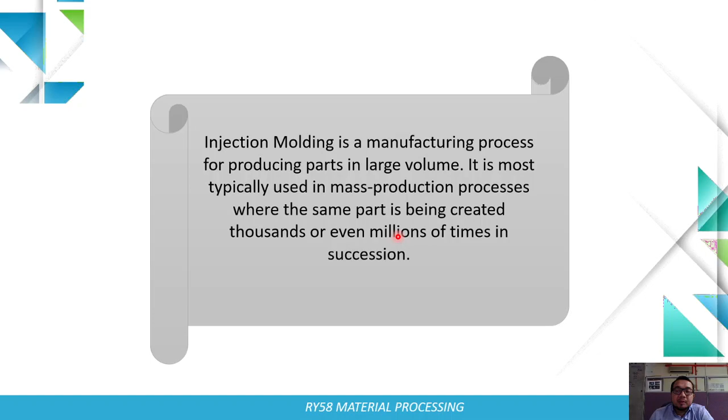For the introduction, injection molding is a manufacturing process for producing parts in large volume. It is most typically used in mass production where the same part is created thousands or even millions of times in succession. The principal advantage of injection molding is the ability to scale production once the initial cost has been paid. The price per unit during injection molded manufacturing is extremely low, and it tends to drop drastically as more parts are produced.

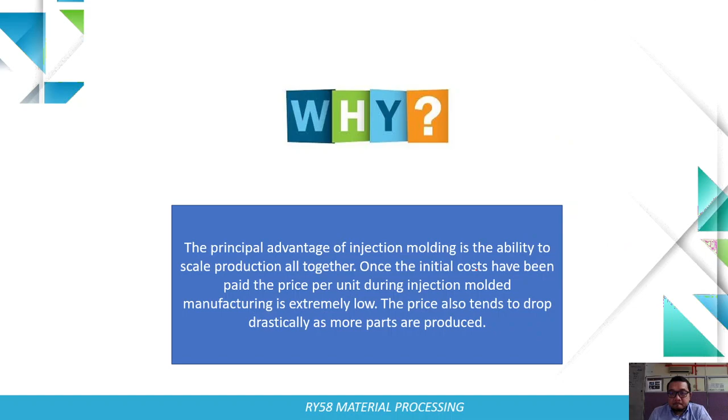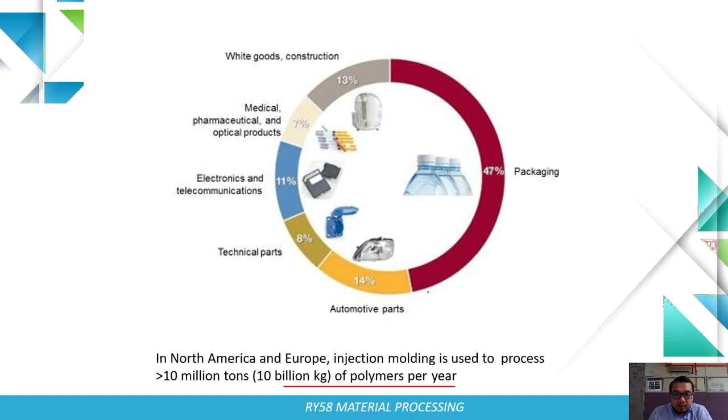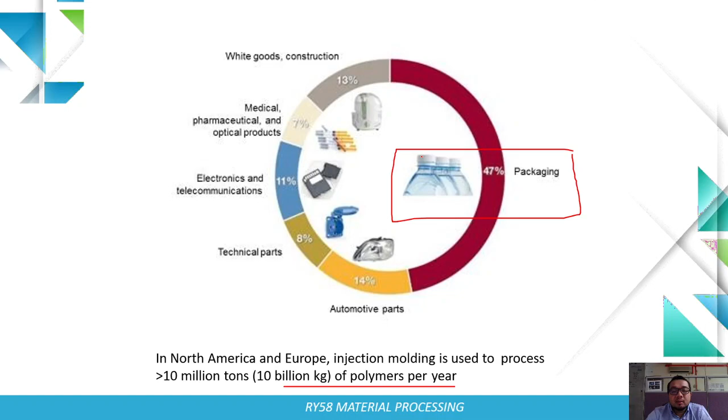This is a pie chart for polymer usage per year in North America and Europe. Injection molding is used to process over 10 million tons, about 10 billion kilograms of polymer per year. This is for white goods: construction 13%, medical, pharmaceutical and optical products 7%, electronic and telecommunication 11%, technical parts 8%, automotive parts 14%, and the rest is for packaging. So this is the uses of polymer per year in America and Europe.

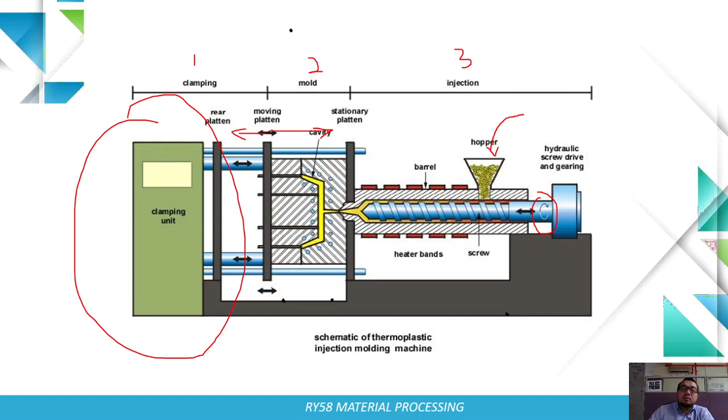This is the schematic diagram for the injection molding machine. Firstly, a hot or molten polymer is injected into a closed and cold mold for thermoplastic, and a hot mold for rubber and thermoset. For rubber and thermoset, it only uses a hot mold, but for thermoplastic, it can be used for both closed and cold mold.

So the polymer is heated and molten in the barrel. A screw injects the melt polymer into the mold through a nozzle. After the part cools and solidifies, the mold is opened and the part is ejected.

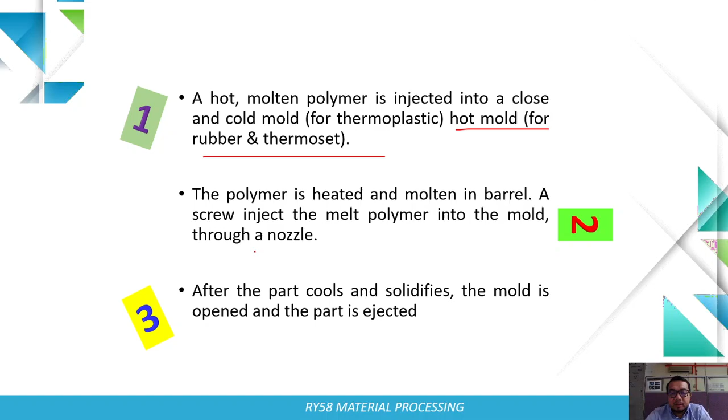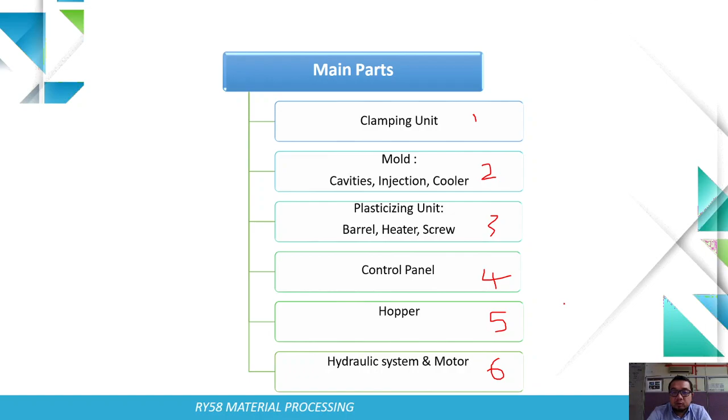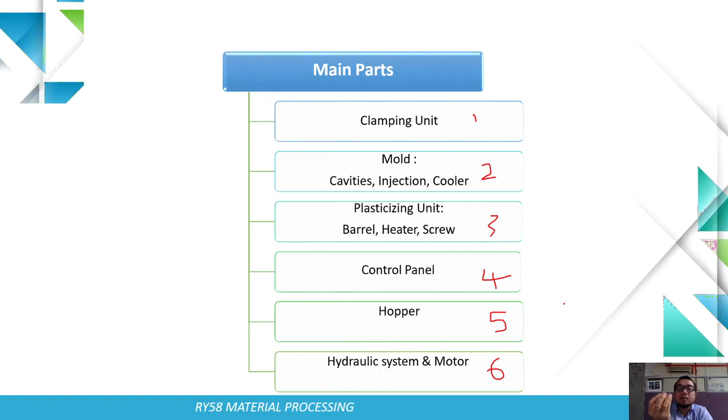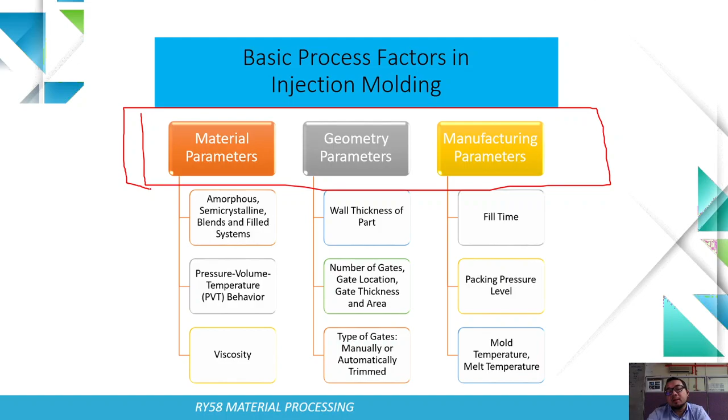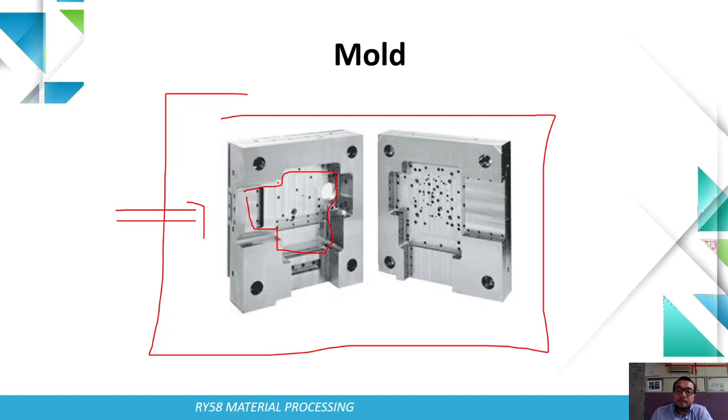This is the mold cavity space: this is the mold and this is the cavity space, the inner part. Cavity is this empty space. So the mold cavity space is a shape inside the mold. So the molding material will take on the shape of the cavity space into the desired product.

Mold in foundries is destroyed to release the product. Today, mold for injection molding are made from strong, durable materials: steel, softer aluminium, metal alloy, and certain plastic. Before, most molds were made and then had to be broken to get the sample out. But today, molds for injection molding are made from material that is strong and durable.

So, number of cavities: particularly mold for larger products are built with only one cavity space, or single cavity mold. However, many molds, especially for large production mold, are built with 2 or more cavities. So the reason is why?

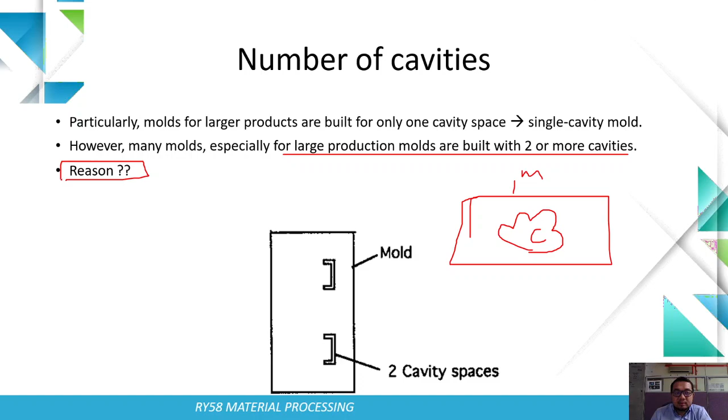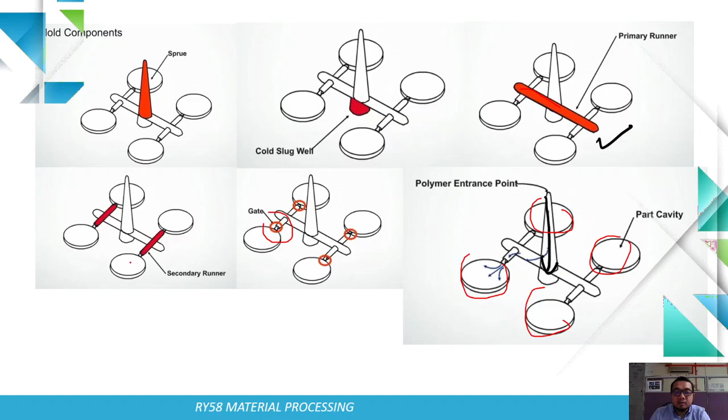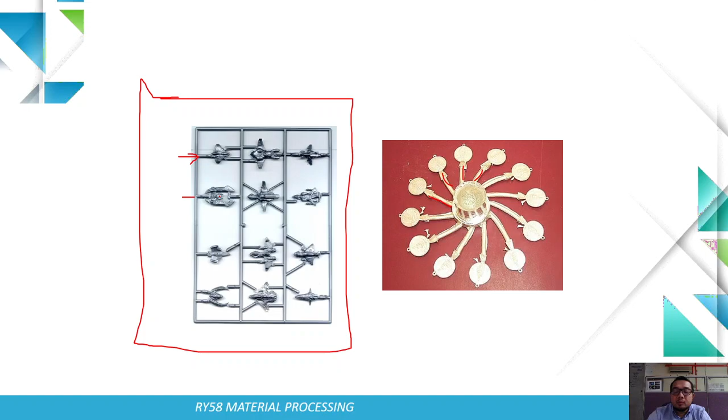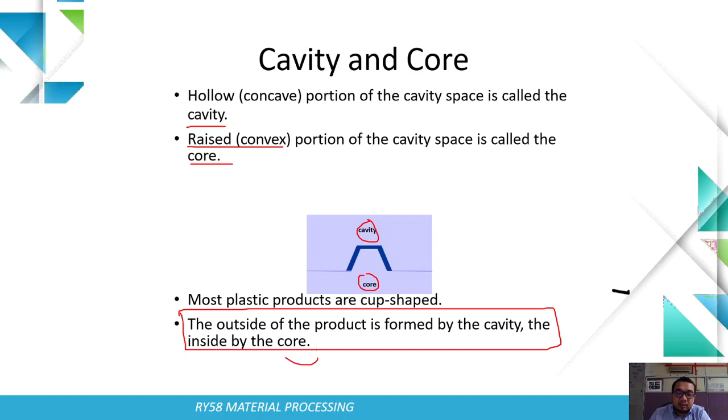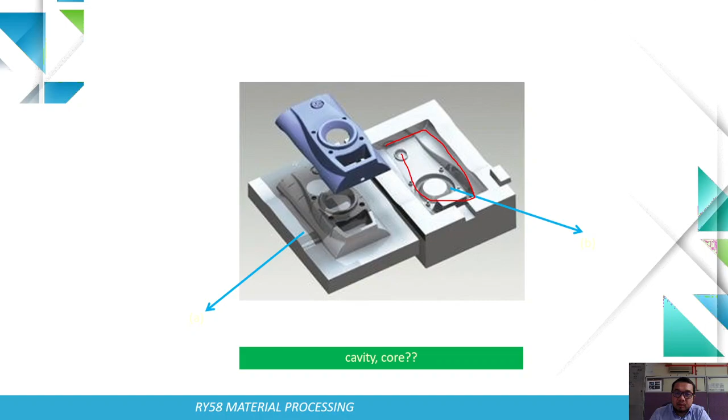So which one is cavity? Which one is core? Okay. This is cavities, ruang kosong. And inside the cavity is core. This is the core and this is the cavity.

So what is the parting line? Parting line is the flat parting line di antara cavity dan juga core.

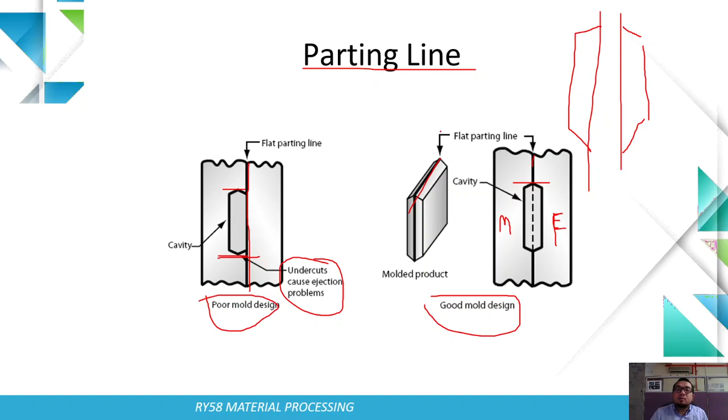Kalau kat sini, contoh dia ambil sekerat je. Ini sekerat, nak bagi nampak lagi lah. Dia boleh terus tarik keluar daripada shape tu. So this is the typical flat or straight parting line for different cavity shapes. This is the product, the sample kamu. Kita tengok dia punya parting line semua dekat, dia ambil dekat tengah sebab nak memudahkan proses ejection.

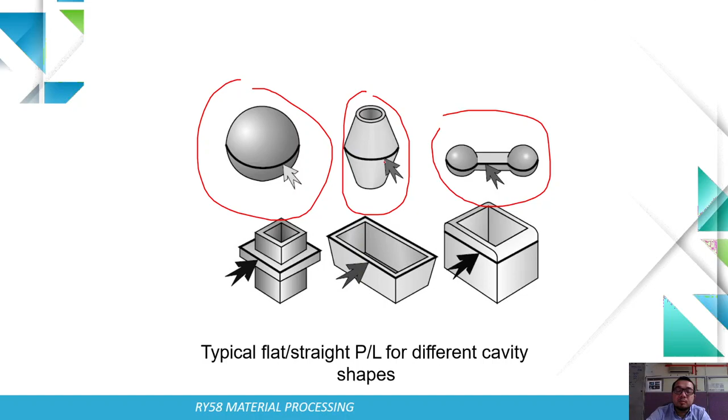So the second part is sprue, runner dan juga gate. Ini yang dipanggil, yang saya tunjuk tadi, yang kon merah ni. Nampak kon? Ini dipanggil sprue. Bukan yang putih ni, yang merah ni.

The sprue bushing receives the plasticated material from the injection nozzle, which closes off the barrel and is pressed firmly against the sprue bushing. Frequently, a single cavity mold has only a sprue, the part is then said to be sprue-gated. Dia inject masuk kat sini, kamu punya plastic material, dia masuk memenuhi sini dan terus melalui runner, pergi ke runner dan masuk dekat kamu punya cavity. This is the sprue bushing and this is the sprue.

So runner is the primary runner and you got the second runner. Runner macam Foodpanda, runner untuk kamu punya makanan dengan kedai. Sama juga macam ini, runner digunakan dalam sistem ni adalah untuk menghubungkan material yang daripada sprue tadi ke kamu punya cavities. Itu adalah fungsi runner.

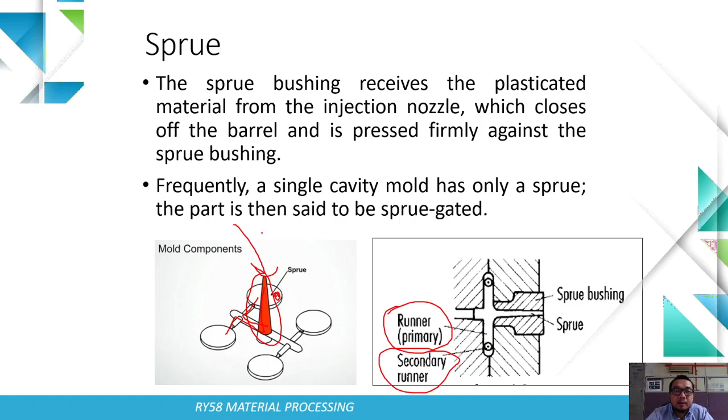Yang duk confuse apa itu fungsi runner, apa itu fungsi sprue. Runner, ingat satu, bagi contoh yang mudah, Foodpanda punya runner. Foodpanda punya runner menghubungkan kedai makanan dengan kamu. Kamu tu cavity, raw material adalah kedai makanan, Foodpanda adalah runner. Macam tu, boleh faham lah apa itu sprue dengan runner.

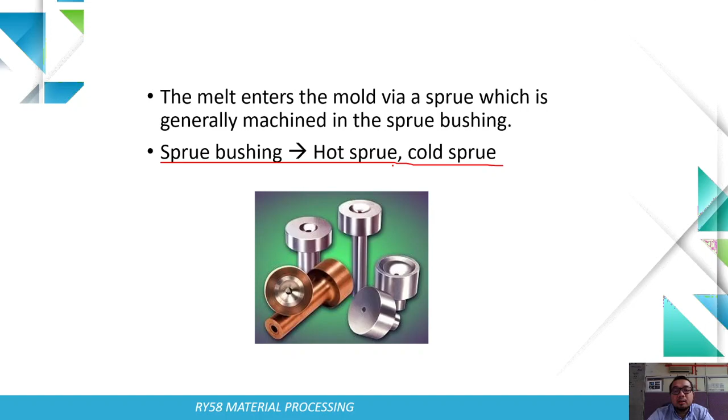So the melt enters the mold via a sprue, which is generally machined in the sprue bushing. Sprue bushing, hot sprue and cold sprue. Dia ada dua jenis sprue, hot dan juga cold. So runner connects the sprue via gate with the cavity.

Lagi ada lagi, yang saya tunjuk tadi, yang dia daripada sprue ni tadi, dia nak sampai ke cavity, dia melalui runner. So it has to distribute the material in such a way that the melt is in the same condition and under the same pressure, fill all cavities at the same time.

So penuh dapat tak mainan? Kadang-kadang beli mainan yang sama tapi bentuk dia tak fill penuh. So yang tu yang maksudnya it has the same condition and under the same pressure. Ada tempat part yang tak dapat pressure yang sama, so dia tak memenuhi cavity tu. Tu yang sometimes beli banyak mainan yang sama, dapat mainan yang sama, ada yang dapat penuh solid, ada yang dapat lepeh gitu. Dia tak sama, sebab itu yang membezakan kualiti.

Kualiti mainan tu. So plasticated material enters the runner of the cool mold. Heated, ni dia punya proses. Heat is rapidly removed from the material close to the wall, forming a skin that provides a heat insulating layer for the material flowing in the center of the channel. A hot fluid core is formed through which the plastic flows to the cavity. This hot core must be maintained until the molded part is completely solid.

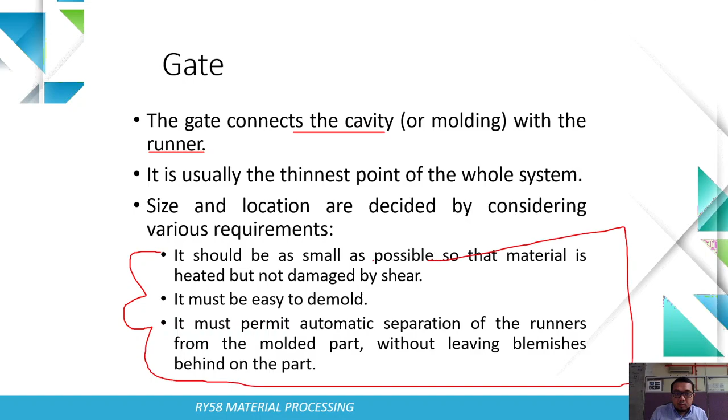Gate lah, gate. So it is usually the thinnest point of the whole system. Size and location are decided by considering various requirements. So this is the requirement yang diperlukan untuk gate. So firstly, it should be as small as possible so that material is heated but not damaged by shear. The second one is it must be easy to demold. It must permit automatic separation of the runner from the molded part without leaving blemish behind on the part.

So this is the cross section of gate and their position at the runner. So this is the gate, this is the runner and this is the gate. Tempat kamu nak patahkan tu.

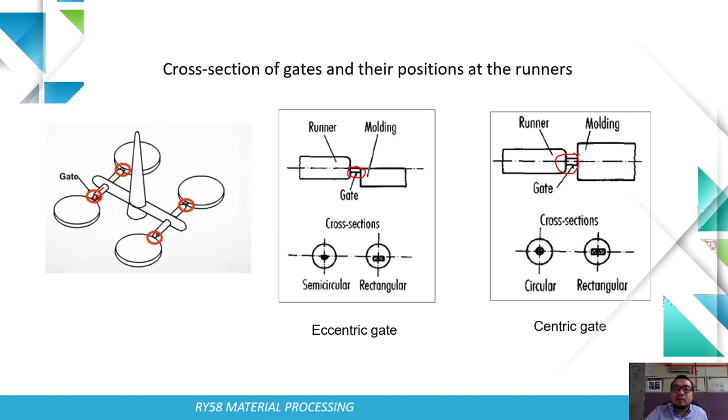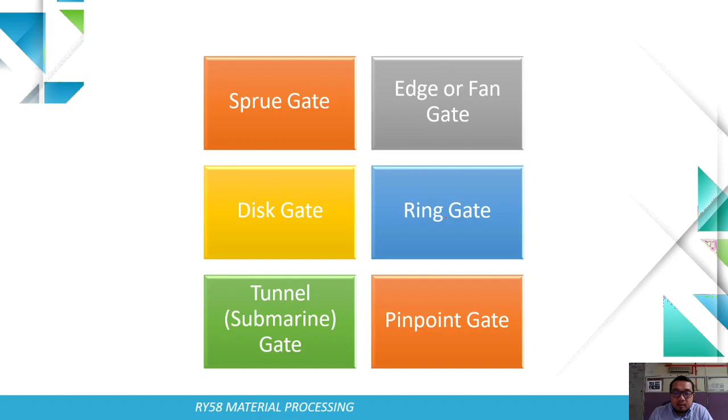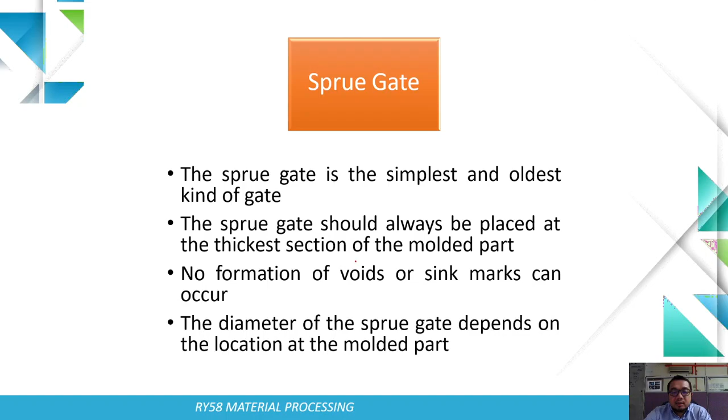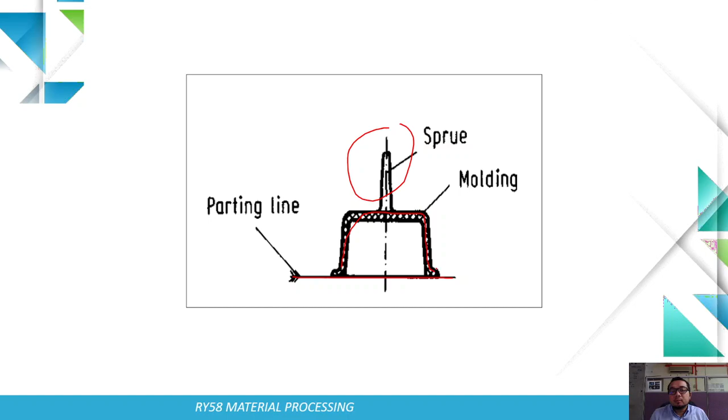So the second one is edge or fan gate. An edge gate is primarily used for molding parts with large surface and thin walls. So for the advantages: parallel orientation across the whole width, important for optical parts. Uniform shrinkage in the direction of flow and transverse, important for crystalline materials.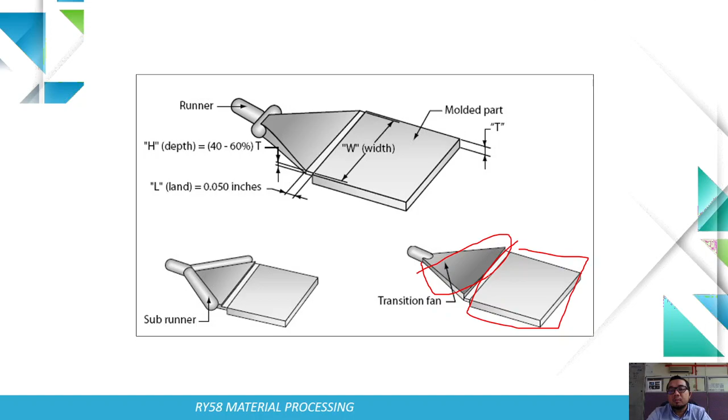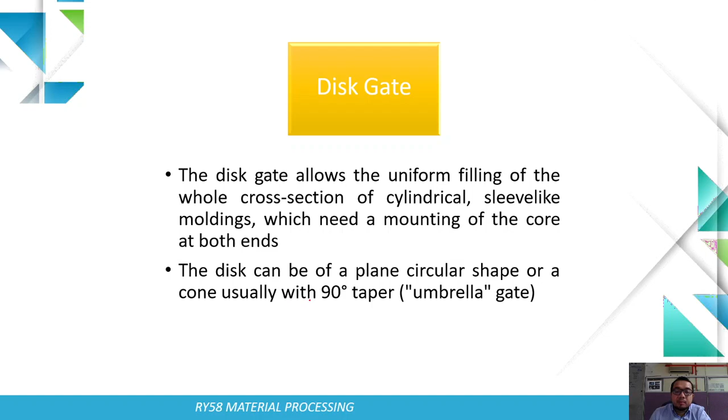Then the third one is disk gate. The disk gate allows the uniform filling of the whole cross section of cylindrical sleeve-like moldings which need a mounting of the core at both ends. The disk can be a plane circular shape or a cone, usually with 90-degree taper, or umbrella gate. So this is the disc gate, the molded part. This is the sprue.

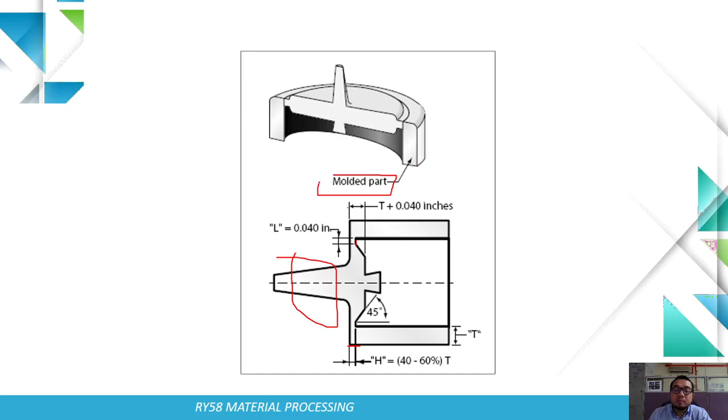So the next one is ring gate. Okay, a ring gate is employed for cylindrical parts.

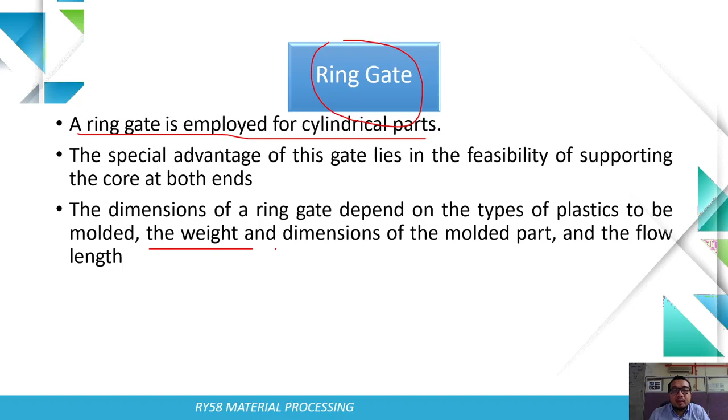So the special advantage of this gate lies in the feasibility of supporting the core at both ends. The dimension of a ring gate depends on the type of plastic to be molded, the weight and dimension of the molded part, and the flow length. So this is the internal ring gate, and this is the diagram for external ring gate.

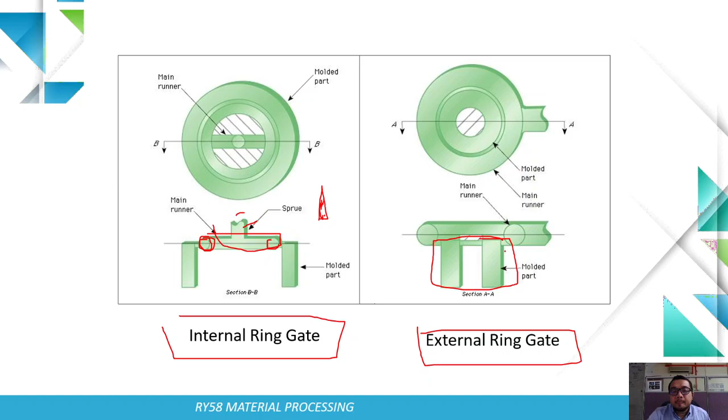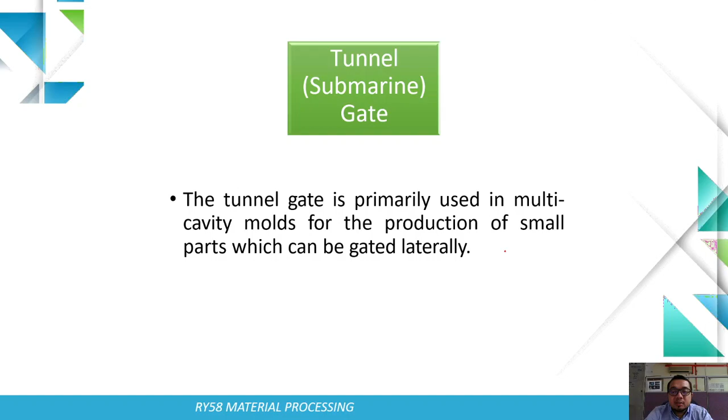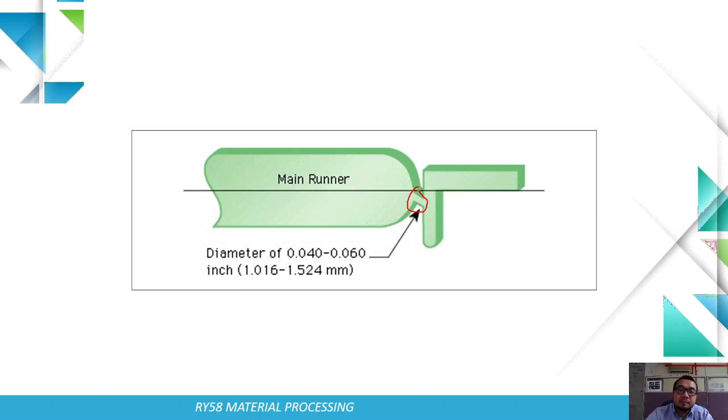So next is tunnel or submarine gate. The tunnel gate is primarily used in multi-cavity molds for the production of small parts which can be gated laterally. So this is the main runner, this is the gate or the submarine. And then the next one is pinpoint gate.

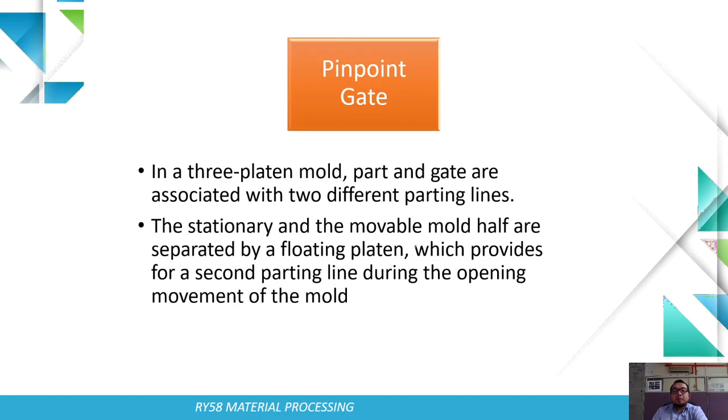In a 3-plate mold, part and gate are associated with 2 different parting lines. So the stationary and the movable mold half are separated by a floating platen, which provides for a second parting line during the opening movement of the mold. So this is the parting line, PL. This is the runner, sprue, and gate.

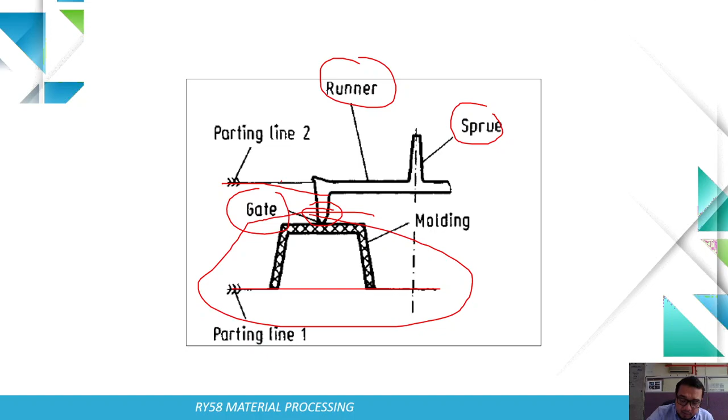Okay, next is gate molding effects. So ideally the gate should be positioned to allow an even flow of the melt into the cavity so that it fills uniformly and the advancing melt front spreads out and reaches the various cavity extremities simultaneously.